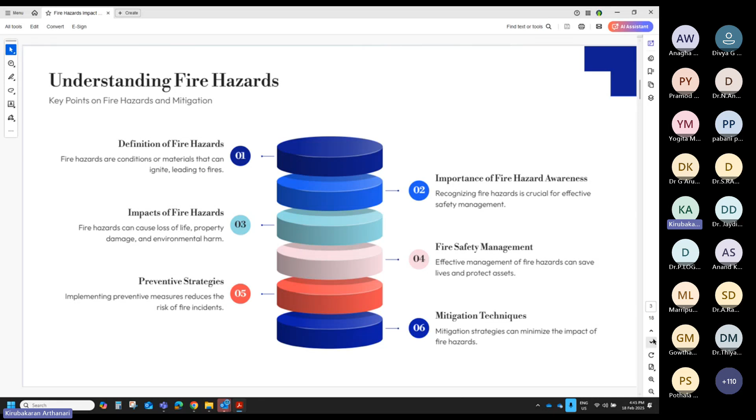Moving on to the next one, understanding the different fire hazards. I'll give you an overview. There are a couple of factors. One is electrical hazards - that's a major thing which plays a role. Faulty wiring, overloaded circuits, or damaged appliances can ignite fires. That's an electrical hazard.

There are items or materials which can lead to fire, like flammable liquids, flammable gases, or reactive chemicals - if some chemicals, a couple of chemicals...

Sorry for the interruption. Is there any problem in the presentation? I think some participant's mic is on. Sir, yeah, it has been muted, sir. Yeah, yeah, okay, shall I continue? Yeah, you can proceed. Yeah, thanks.

So as I said, flammable liquids, gases, or chemicals need to be stored separately. If they react, it can lead to fire or explosion. Those items are called chemical hazards.

Then we have environmental hazards like vegetation - uncontrolled or untreated vegetation, wildfires, and insufficient fire breaks, which can lead to bigger danger. We have a live example in 2025, the US wildfire, which had a huge impact in the US. We will come to that - I have some information about that incident, and we will brief into it.

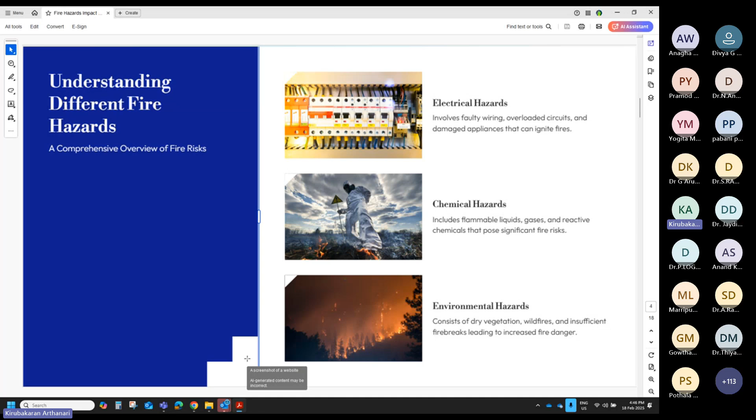So the types of fire hazards - identifying various sources of fire risks. First is flammable material, such as gasoline, wood, textiles, which can ignite fires. Those are called flammable materials. The proper handling and proper storage of flammable materials is very important in order to avoid fire hazards.

Then we have electrical hazards - faulty wiring, overloaded circuits, or improper use of appliances, which can result in electrical fires that often spread rapidly and unpredictably. Routine maintenance and checking of electrical wirings, appliances, or switches need to be monitored and maintained regularly, so that we can easily avoid electrical hazards.

Then we have chemical hazards. As I said, there are highly flammable chemicals, especially in the construction industry, like shuttering oil, adhesives, or grouting materials, which can lead to fire. These things have to be stored in a proper location in a segregated manner, properly labeled, cleaned, and stacked properly to avoid any explosion.

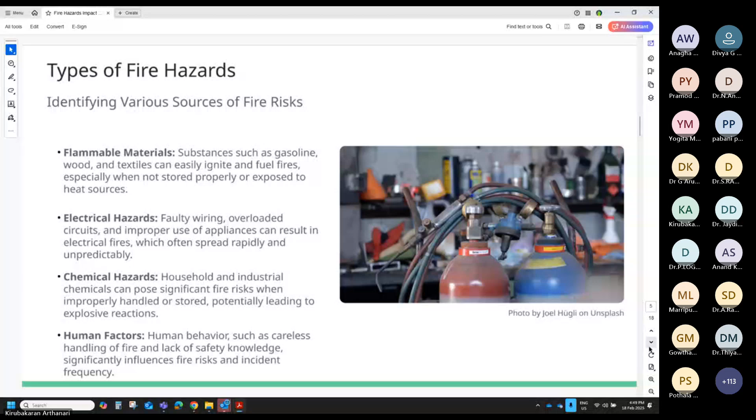Understanding the causes: human error - statistics have revealed that around 50% of fires are attributed to human activities, underscoring the need for public awareness. People are either not properly trained, or awareness is not being given, or they are careless. That behavior can lead to a major accident.

Then we have equipment failure and natural causes, which we can avoid if proper maintenance and proper handling of things is done in a proper way. Then we can avoid those kinds of fire hazards.

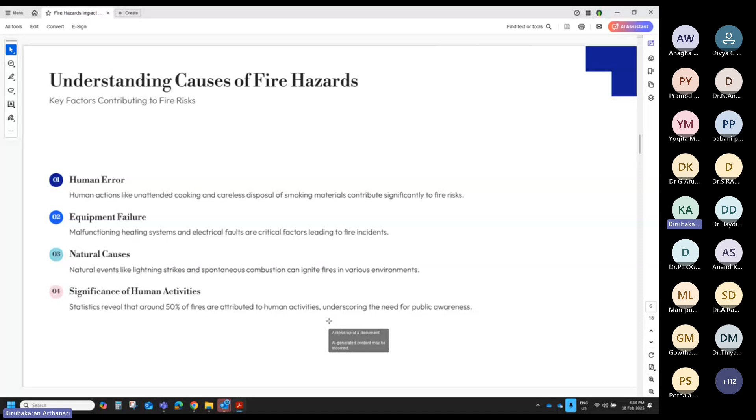Next, we can come to the significant consequences of fire hazards. The first thing is loss of life. In any case or factor, we don't want loss of life - that is the most significant consequence of fire hazards. Fire accidents result in thousands of fatalities annually, highlighting the urgent need for fire safety measures.

And we have property damages. Economically, it can affect individuals, society, and the nation as well. For example, take the US - there was a major fire which affected the entire country's economy, going in the wrong direction, because the amount of damage caused by this wildfire is unimaginable. We don't want that.

Then environmental effects - wildfires devastate ecosystems and contribute to air pollution, impacting wildlife and human health. The quality of air due to fire accidents is hugely affected. It's not just that fire happens and that's it - once burning happens, toxic gases are exhausted, which can lead to further complications like breathing issues and respiratory diseases. All those things can contribute.

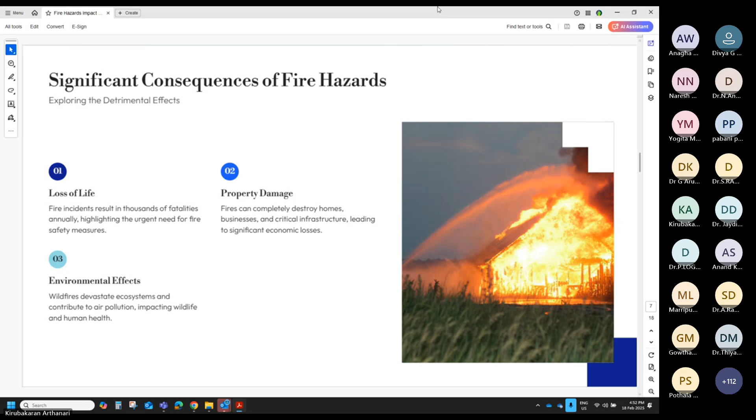So the impact includes economic losses, environmental damage, human health risks, and psychological effects. Economic losses, as discussed, can burden individuals through property damage and loss of productivity. Environmentally, wildfires and structural fires can degrade air, soil, and water quality. And for human health risks, we have long-term issues such as respiratory problems due to smoke inhalation.

That can affect people long term - it's not like it happens one day and is cured the next. It will be a long-term effect due to inhalation, and then there are psychological effects - the trauma which can happen due to such major accidents needs to be taken care of. It's not a day's job; it will take months and years to recover from that trauma.

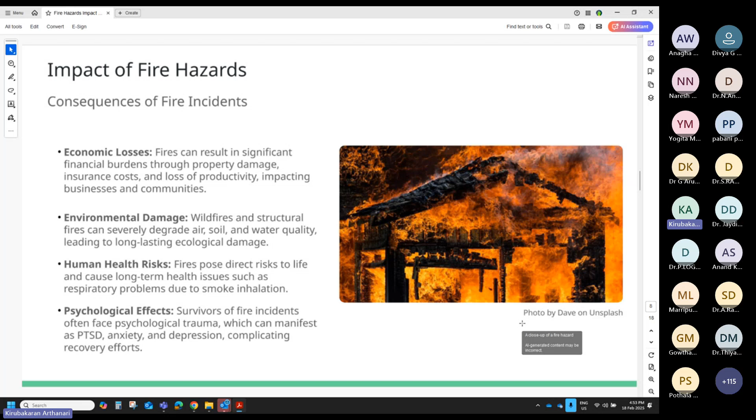So one small case study which we've all seen in the media: in early 2025, in the month of January, there was a huge wildfire in the US, especially in the Southern California area - Los Angeles and the metropolitan cities of San Diego County. There was a major fire.

The key facts are: more than 29 people were killed - it's not an accurate number, just some facts from the media. More than 200,000 people were evacuated, forced to leave. More than 18,000 homes and structures were destroyed, and more than 57,000 acres of land were burned.

These key facts are scary - more than 200,000 people were forced to evacuate from their own residences. It is not an easy case, and the structures destroyed - more than 18,000 homes - are a quick fact showing the scale of this disaster.

So this being okay, I can come to that point here.

These fires were exacerbated due to drought conditions, low humidity, vegetation built up from the previous winter, and hurricane-force-like wind, up to 100 miles per hour in some areas.

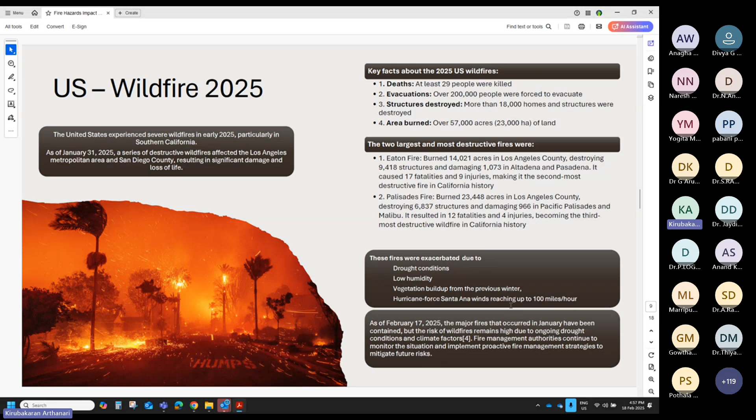In the coming days, hopefully they will have those reservoirs with enough quantity of water. It should not happen again in the coming years, but even then, if it happens, they should have the condition to mitigate those fires.

There, for the slab formwork, normally we use plywood and steel materials. So the slab was ready, the shuttering was completed, and the reinforcements were done. The inspections and quality check, everything was completed.

At night we were supposed to concrete that particular slab, but due to some reason we were not able to get the concrete, so the concrete pouring was shifted to the next day morning. We all went back home, and during the night, around midnight, we got a call that our slab was on fire. So we all rushed back, and unfortunately it was all eaten up.

The fire had already spread too much, the entire slab was on complete fire. We did the firefighting, but unfortunately we were not able to save any of the property. All the property was damaged - the formwork materials, the reinforcement, everything was destroyed. We had to chip those concretes again and redo those things.

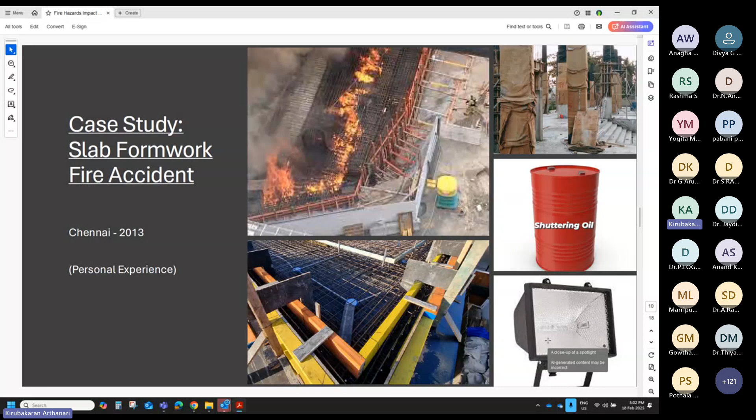Then moving on to the next one: fire risk assessment, strategizing the fire safety. We need to identify the potential hazards, where on the sites how we are keeping the materials and which can pose fire risks. That needs to be identified, labeled, marked in a proper way, and protected properly.

The second thing is we need to evaluate how materials are stored and evaluate the risk levels, how dangerous or how easily it can cause fire. Based on that, it needs to be taken care of in high priority, medium priority, and low priority. That risk assessment management has to be done during construction or after, it doesn't matter, but it has to be done. And we need to prioritize based on the frequency and intensity of the fire hazard which can happen. So these are the three things we need to do, called fire risk assessment.

Based on that fire risk assessment, we need to do the mitigation plan also, and we need to strategize it.

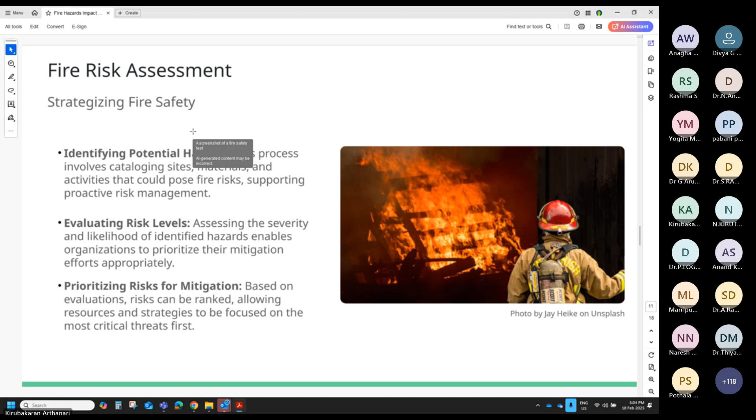Fire prevention strategies for mitigating fire hazards effectively. The first thing is education and training. Regular training programs have to be conducted for the laborers or technicians working in the construction industry and the residents who are going to stay in that particular building. Once they are into the building, frequent fire safety drills or mock drills have to be conducted. They need to be trained properly: even if there is a fire accident, what is the quickest path or evacuation path they need to follow to exit the building at the earliest. They cannot use the lift, they need to use the staircase, and go to an assembly point wherein there won't be any further hazards.

Those kinds of trainings need to be given to the people, that is the first thing. Then the proper storage of flammable materials, which is already discussed, and regular maintenance of equipment.

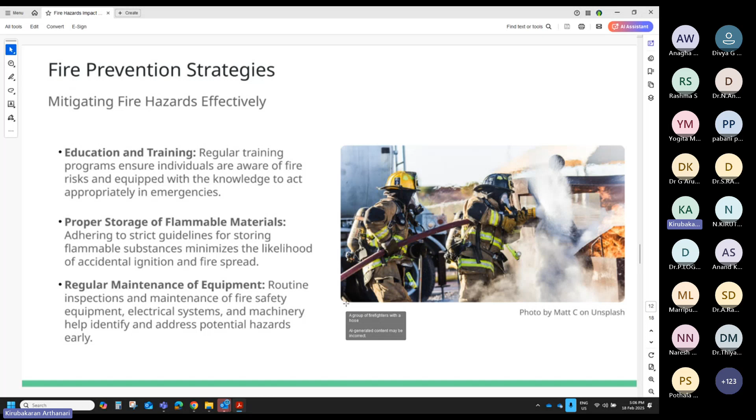So any material, any equipment which has been used in a particular area or site has to be properly maintained, properly inspected on a regular basis to avoid any further fire accidents or fire hazards. Even the fire safety equipment - the fire extinguishers kept on the floors - needs to be checked on a regular basis, every 3 or 6 months, so that in case of any unwanted situations when we try to use the fire safety equipment, it cannot give further complications. It should not lead to further hazards. So that needs to be well maintained and well checked in advance.

Fire suppression techniques, water-based systems. We have fire hydrants, sprinklers, and water cooling and smothering properties of the extinguisher for fighting fires effectively. So we have fire hydrants and sprinklers.

So fire hydrants have to be used manually when the firefighters come. We have a fire hydrant, they can connect to it and mitigate the fire. And we have a separate standalone fire pump room which has a tank with a full amount of water, which cannot be used for any other activities other than firefighting. So that is a strict rule which is followed here.

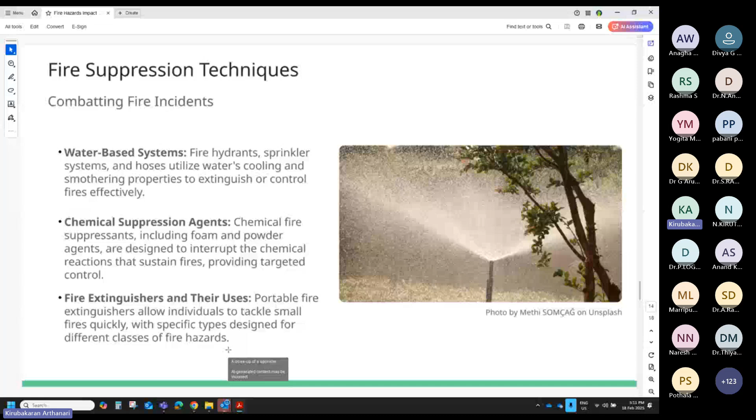Then emergency response planning: we need to create the emergency plan, train the people, and do the evacuation procedures. First of all, we need to identify the emergency plan. Meaning if there is a fire in a particular building, what is the evacuation plan? What is the best route the people in that building can take to escape from the fire at the earliest? That needs to be decided during the design stage itself. We need to create that emergency plan and it needs to be followed.

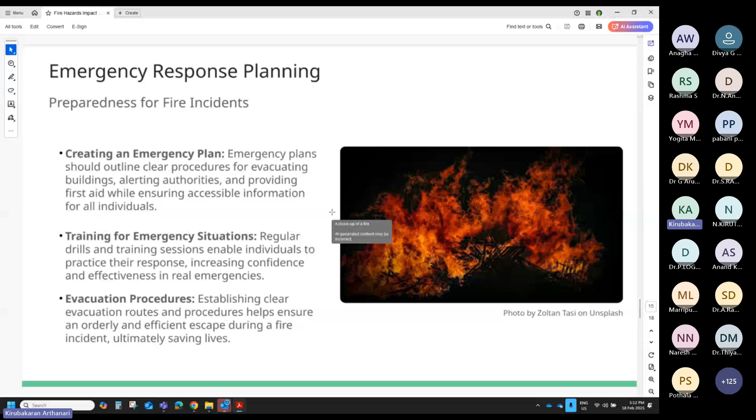So I'll show you the drawing which has the evacuation plan and how to notify the people quickly that there is a fire and we need to evacuate the building. So we have a system running for that. I'll show you the drawing and explain about it.

So there are some drawing references which have been used in our buildings. I won't go too deep into those drawings, but let me show you some drawings.

So first of all, there is a thing called MEP penetrations. Concrete will not transfer fire from one area to another area, it will stop the fire. But we have MEP - mechanical, electrical, and plumbing - penetrations from one room to another or from one floor to another floor. That is called MEP penetration.

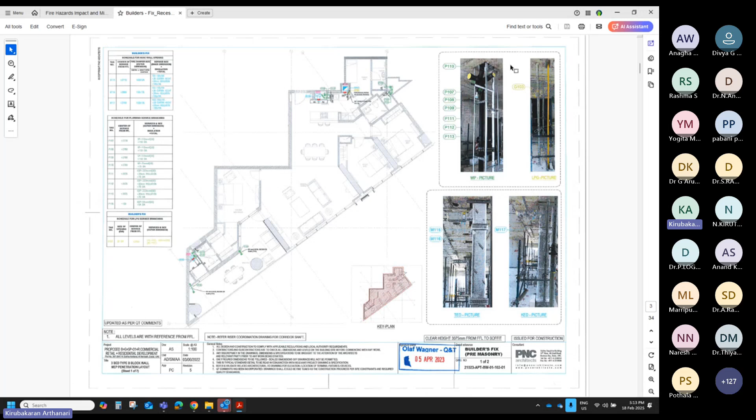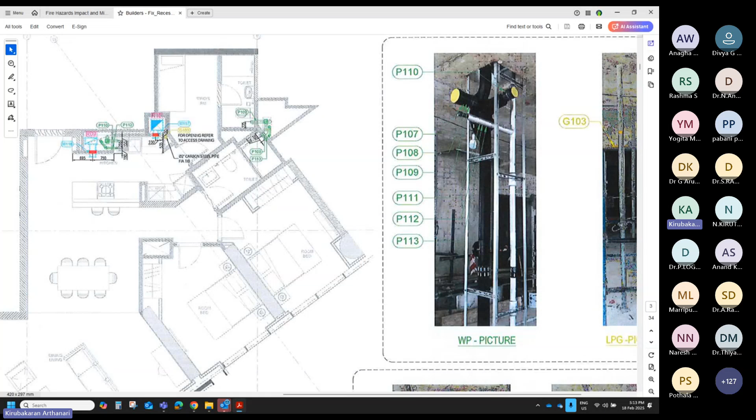For example, this is a drainage pipe which runs from top to bottom - if the building is 25 floors, it runs from ground floor to the 25th floor. In the slab we have an opening to pass these pipes, which is called MEP penetration. This needs to be properly treated so that if any fire happens on a particular floor, it should not spread to the next floor or the next room. For that, we need to do proper fire protection at the MEP penetration so that the fire cannot go further. I will show you a detail of how we treat this particular condition.

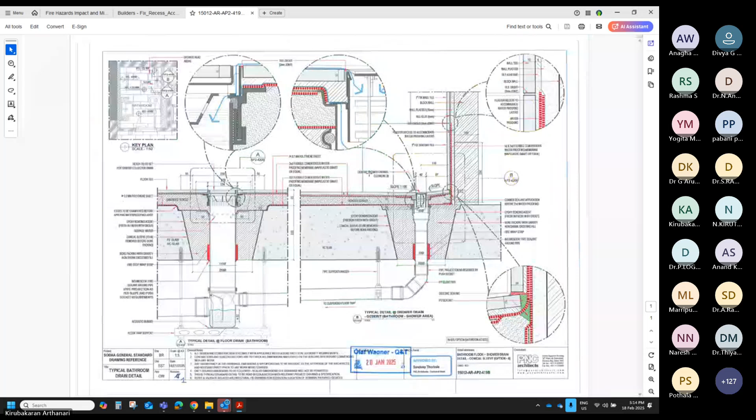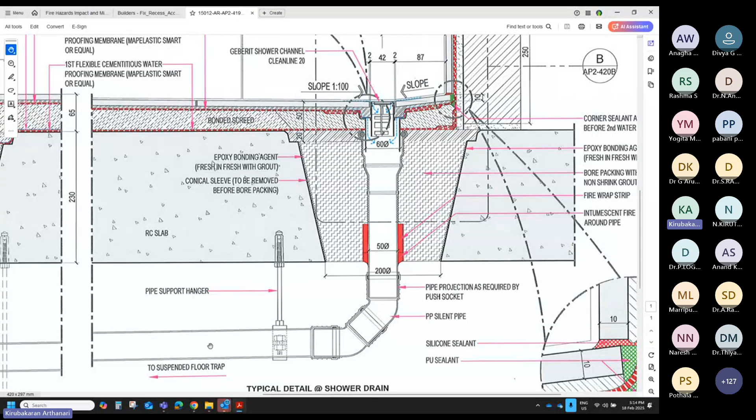So here is the situation: this is the RCC slab, and this is the shower drain and the MEP downtake pipe - the plumbing downtake pipe, which is a polypropylene PP silent pipe. We have an opening of 200mm here, and the pipe passes through it, going from one floor to another floor.

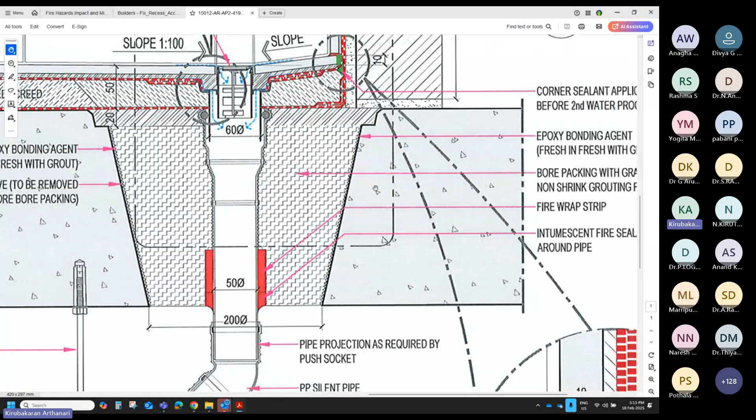Here you can see the intumescent fire sealant around the pipe at the joint. So first there is an opening in the slab, then the downtake pipe is installed. It needs to be properly packed with bore packing non-shrink grouting - once the pipe is fixed, then we do the grouting.

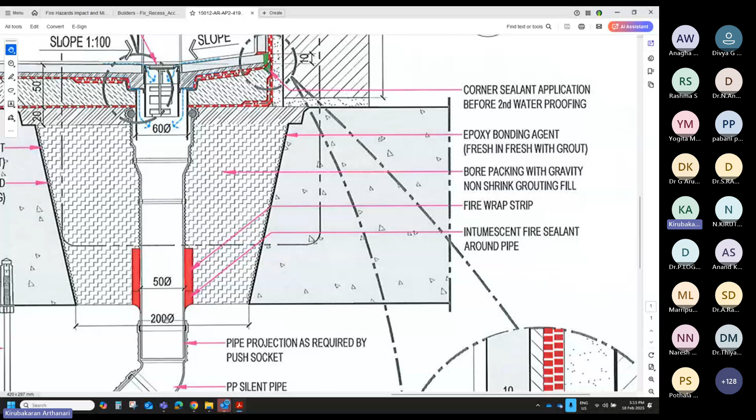After that, we need to do the fire wrap - there is a tape called fire wrap that can contain the fire for up to 2 hours. At the joint, we apply an intumescent fire sealant on the edges, which can also contain the fire for up to 2 hours. This is how each penetration is handled.

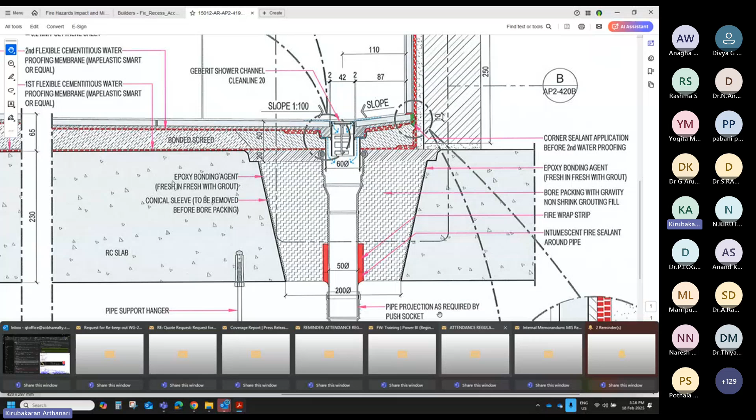Each penetration is taken care of in order to avoid fire transporting from one area to another. So every MEP penetration has to be treated this way to ensure fire is not transmitted from one floor to another. And it has to be done - it's not just a good practice you can optionally do to save people, it is mandatory.

Here in Dubai, as per the Dubai Municipality and Civil Defense regulations, every MEP penetration has to be treated, and there needs to be a sticker - a penetration fire stop system sticker placed at each MEP penetration. It has to be checked and approved by the fire stop company, and only then can we get approval from Dubai Municipality and Civil Defense.

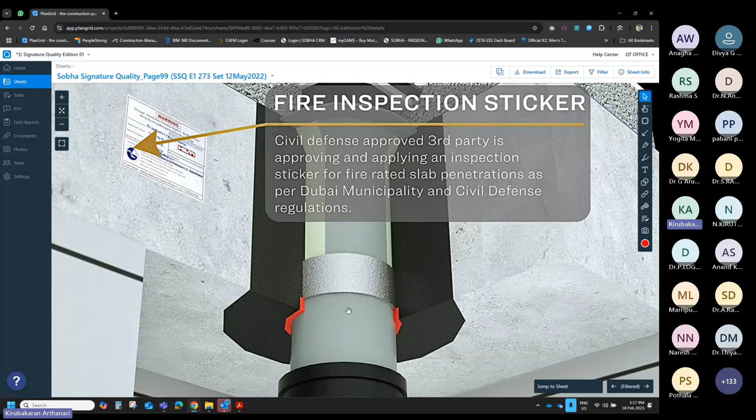So it looks like this: this is the pipe which passes through the slab, and we have what is labeled as fire wrap strip, with a sealant around the joint which can contain the fire from spreading from one floor to another. So this is one condition.

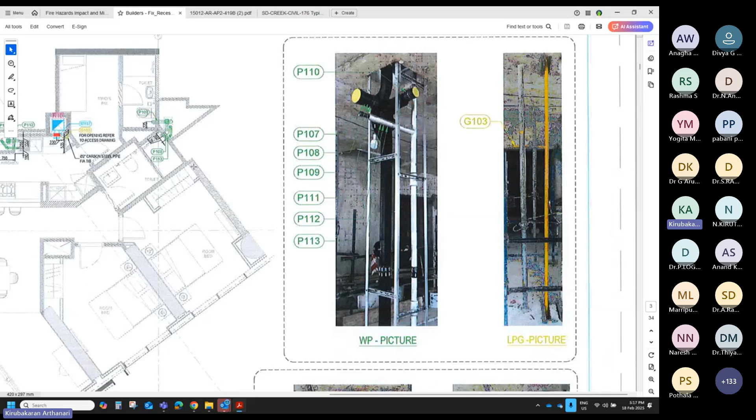We are taking more standards as per Dubai government's standards and regulations. We have more number of standards which need to be followed. I am just showing a couple of examples. One is for the MEP penetrations, which we have seen now, and there is another thing.

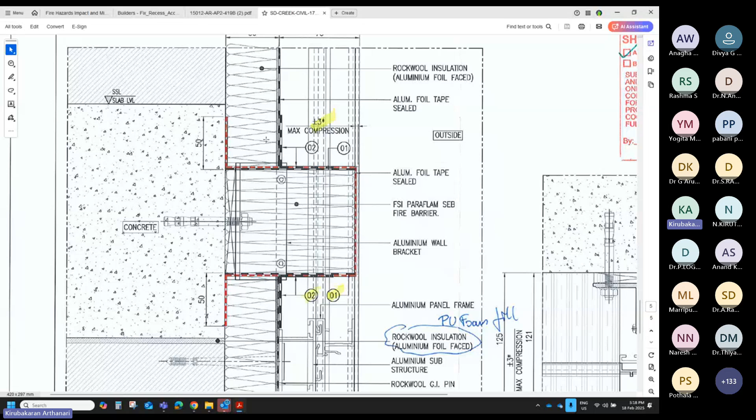Most of the buildings, like 90% of the buildings, have a facade system in front of the building, and there is a chance it can catch fire. For that reason, we have a standard detail where in front of the concrete we have a rock wool fire barrier which needs to be installed. Only then can the facade be installed, so that even if there is fire in the facade area, it should not travel from one area to another. We need to stop the fire at a particular level, so we have this fire barrier made of densified rock wool which needs to be installed.

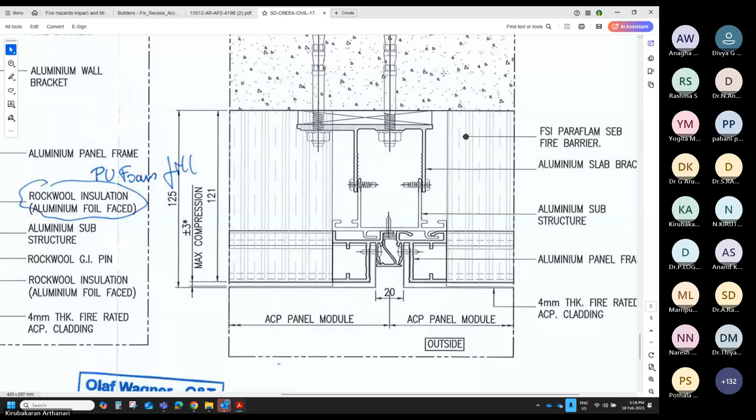This is the concrete, then there is a channel, then we have a fire barrier installed for 125mm, then we have the ACP panel. So if there is any fire in this cavity, it has to be stopped at that particular level. At one level, if there is a fire, it should not travel to another level. That is the idea behind this particular detail.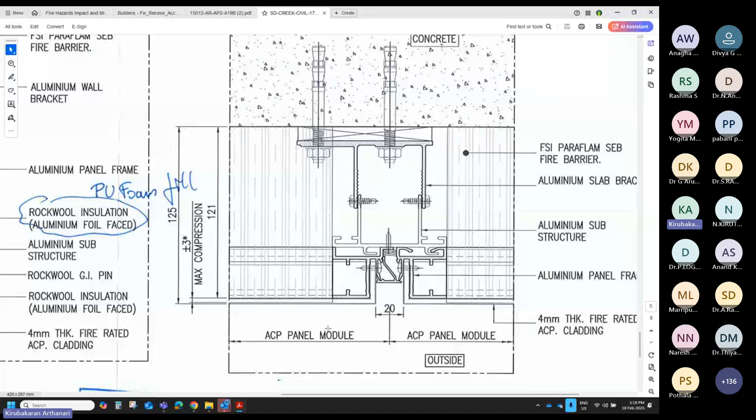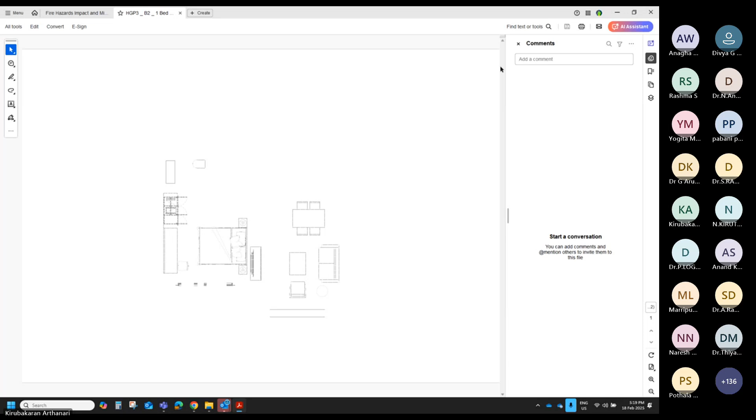So this is about the scenarios we have during construction. It's not the only case, I'm just giving you two examples. Now let me give you another example. This is one standard apartment layout.

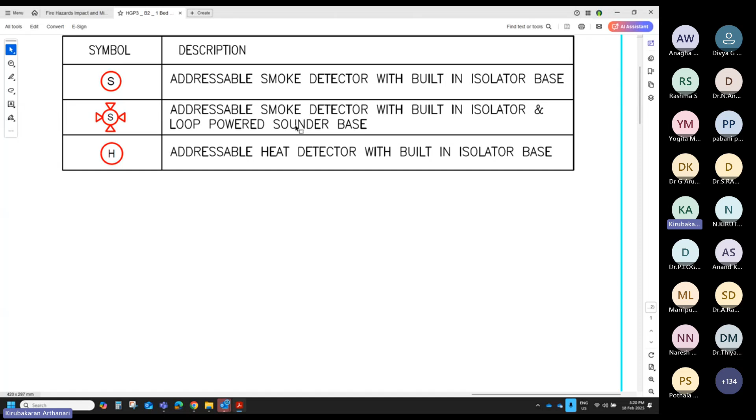Here we have the fire alarm layout. We have three legends: addressable smoke detector with built-in isolator base, addressable smoke detector with built-in isolator and loop powered sounder base, and a heat detector. This is the smoke detector, which is in the bedroom and living area, and in the kitchen we have a heat detector.

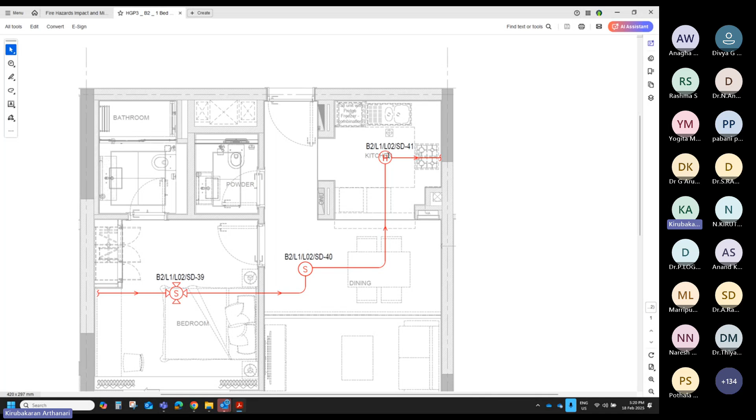Once a particular temperature is reached in the kitchen area that is not normal - the kitchen normally has some heat, but there's a desired threshold value, I'll check on that value and let you know - once the heat detector gets a value more than the normal value, it automatically signals the fire alarm. It triggers the fire alarm, which goes to the security panel, and from there it can be further taken up.

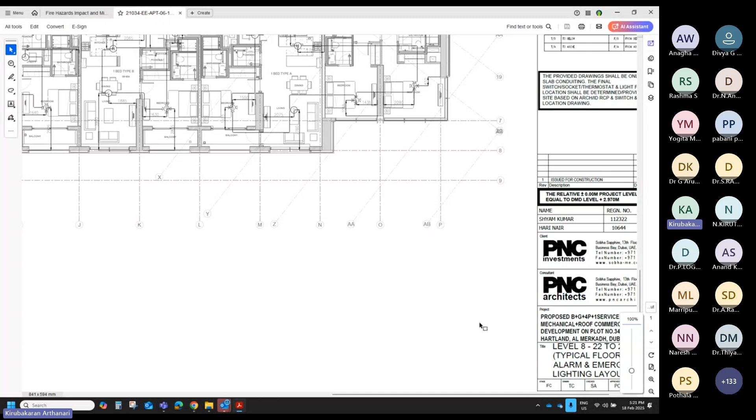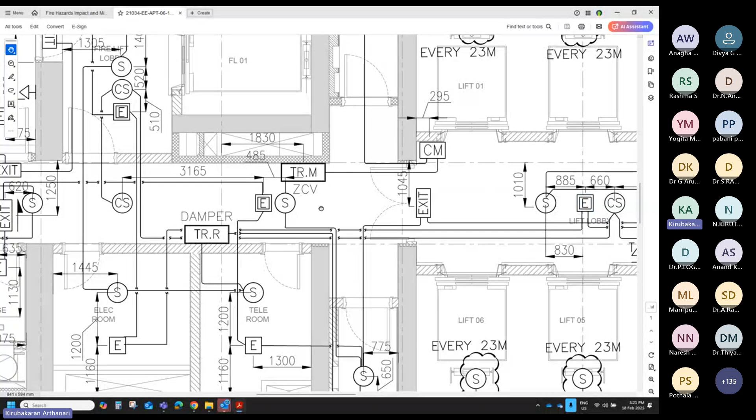Then we have the fire alarm and emergency lighting layout here, this one, for a project in Dubai which we have recently handed over. This is one floor with 10 apartments, and we have these items marked here. I'll show you the legend so we can understand what items are used on one floor for the fire alarm and emergency light.

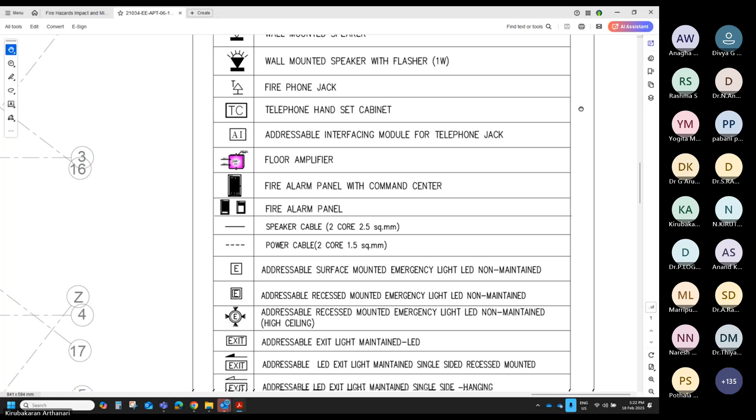There is a ceiling mounted speaker with a flasher and a wall mounted speaker, connected with the building management system. If there is any fire alarm, it will go to this speaker and make sound on each floor in front of each apartment. Then there's the fire phone, telephone, floor amplifier, and fire alarm panel.

Then we have the emergency exit display boards, showing the quickest path to follow in case of fire - that exit has to be shown properly. So we have different types of smoke detectors and heat detectors.

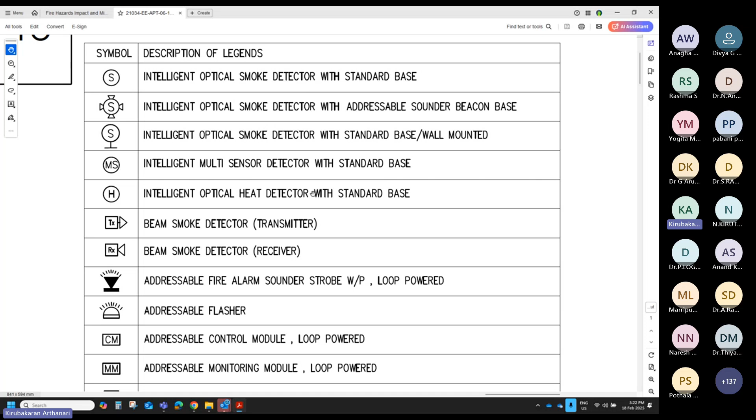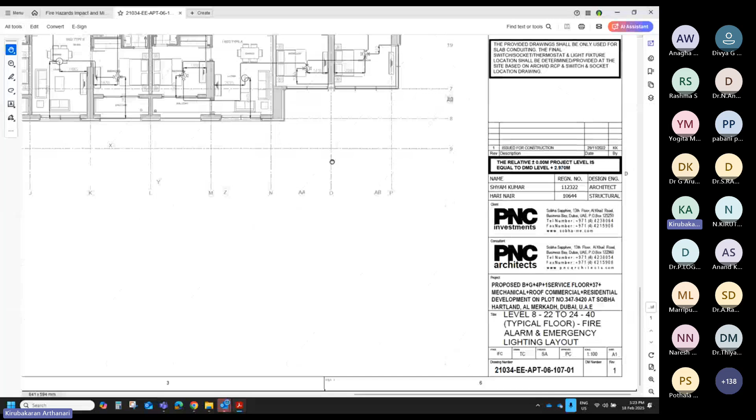So in each apartment, what do we have? A smoke detector in the non-fire areas, let's say, and in the kitchen we have the heat detector. So this is only for the fire alarm and the emergency lighting layout. In terms of fire, in case of fire, how to contain it?

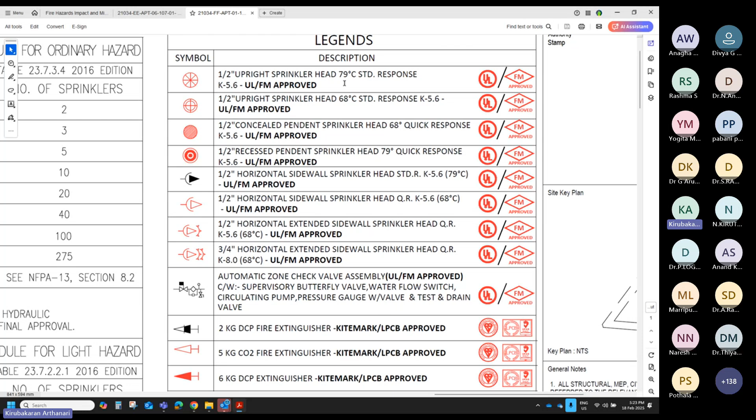So firefighting layout. If we have fire, then what are the things? Here we have the sprinkler, half-inch upright sprinkler, which has a 79-degree standard response, and we have a half-inch upright sprinkler with a 68-degree head. It activates once it reaches 68-degree temperature, and the other activates only when it reaches 79-degree. The 79-degree sprinkler is for the kitchen, and the 68-degree sprinkler is for the non-heat or non-temperature areas.

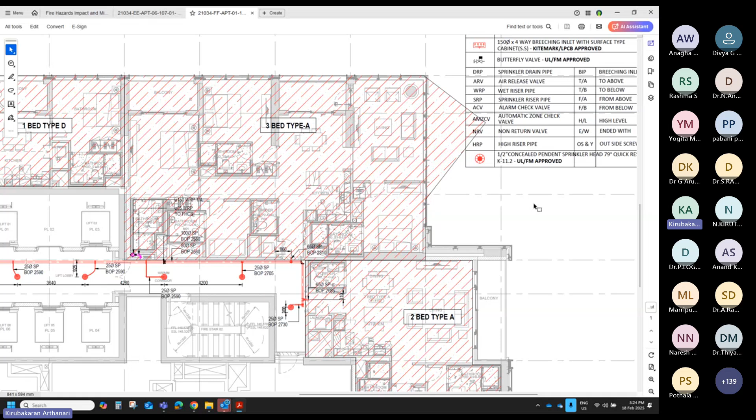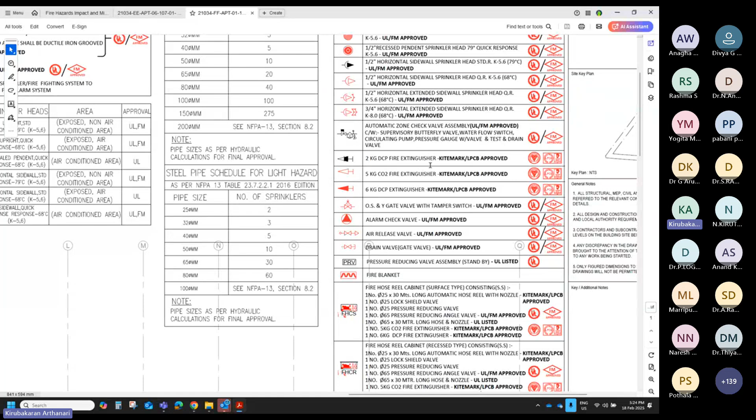So we have the sprinklers, the ceiling sprinklers, and we have the wall sprinklers, and we have extinguishers placed on the corridors, and we have the fire hose cabinet on each floor, and more.

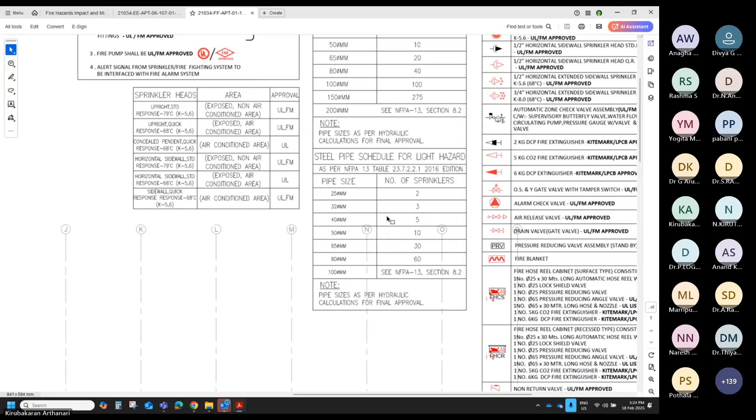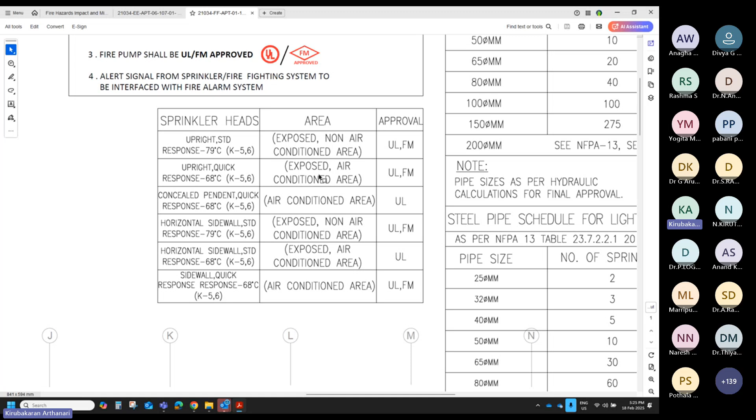So here the sprinkler heads, we have different types of sprinkler heads. Upright 79-degree standard response sprinklers, it is for the exposed non-air conditioned area, and upright quick response 68-degree sprinkler, it is for the exposed and air conditioned area.

Concealed pendant, horizontal side wall. So we have different types of sprinklers which are being installed at different locations based on the authority's standard requirements. So it's not that we decided; it is from the standard codes and rules which have been followed here from the Dubai Municipality and the Dubai Civil Defense.

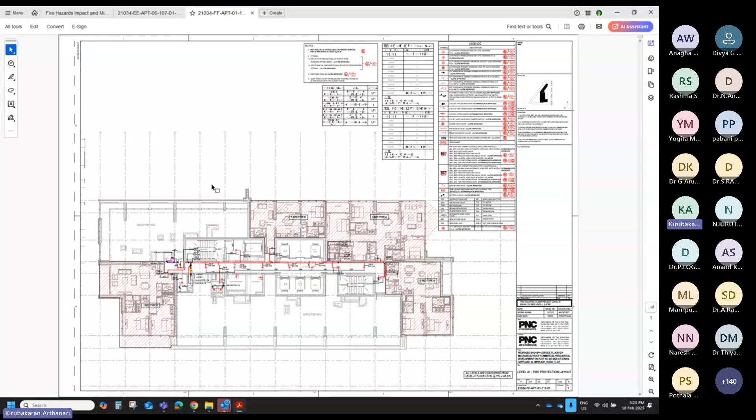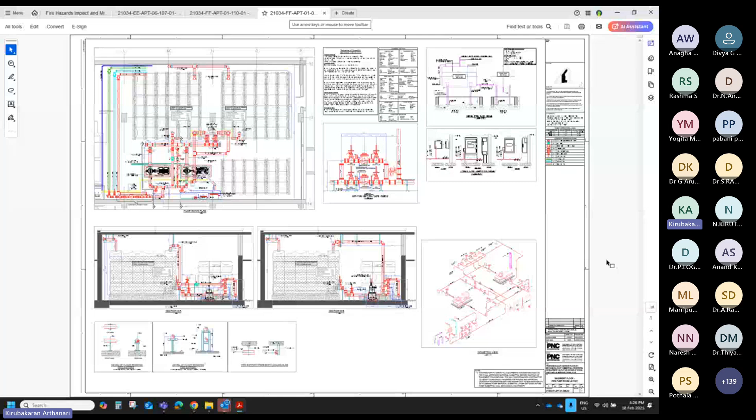And finally, I can show you the drawing for the fire pump room. So this is a standard drawing, or let's say for this particular building, we have a fire pump room at the basement. It has a capacity of...

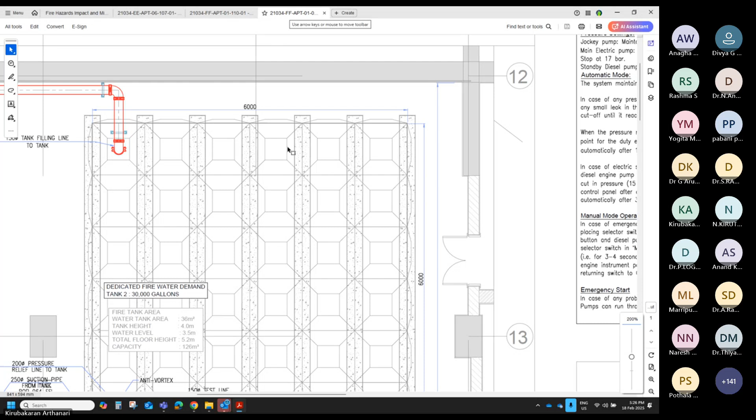Dedicated fire water demand tanks, two of them, each has 30,000 gallons of water. The standard requirement is based on the capacity of the building and the number of floors and the height. Here we have two tanks of 30,000 gallons of water each.

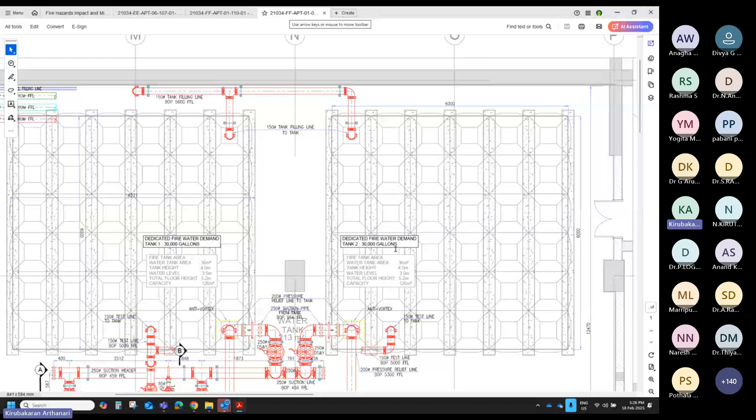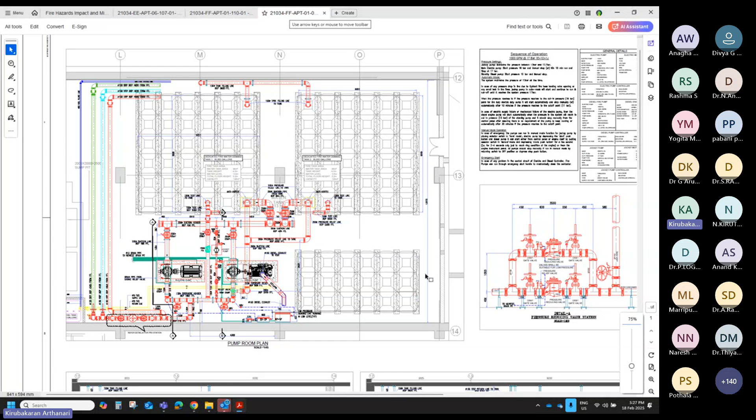And we have the pumps, like one is electrical pump. You can see here, so we have an electric pump and we have a diesel pump, so that at any circumstance we can use both. If electricity is not there, we can still use the diesel pump for the mitigation of fires. So some examples I just wanted to show.

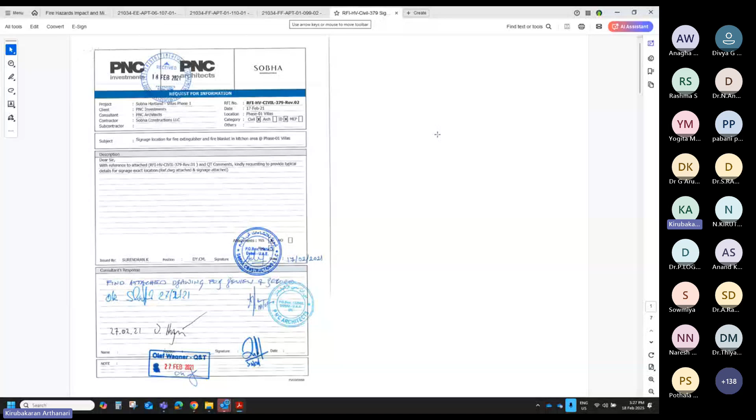Actually, this is not a standard requirement, but from our company we have implemented this particular standard for our buildings. So in case of any fire, for each building or each apartment, we need to provide one fire extinguisher and one fire blanket, and it's normally provided in the kitchen area.

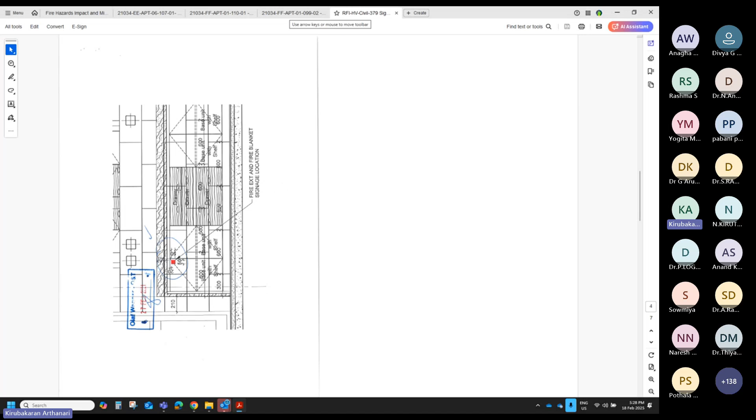And in case of any fire, the resident who is residing in that particular apartment should not struggle to find the extinguisher or the fire blanket. Because in some areas we are keeping it inside cabinets, so they should not struggle to find where it has been kept. For that reason, we have implemented a standard to place this sticker on that cabinet, so that in case of emergency, people can easily and quickly find the fire extinguisher and fire blanket to control the fire at the earliest, as soon as possible, they identify, they can immediately start acting.

So these are some standard practices I wanted to share, which we are following from our company's point of view and in our region, which I wanted to share with you people. Then, any queries?

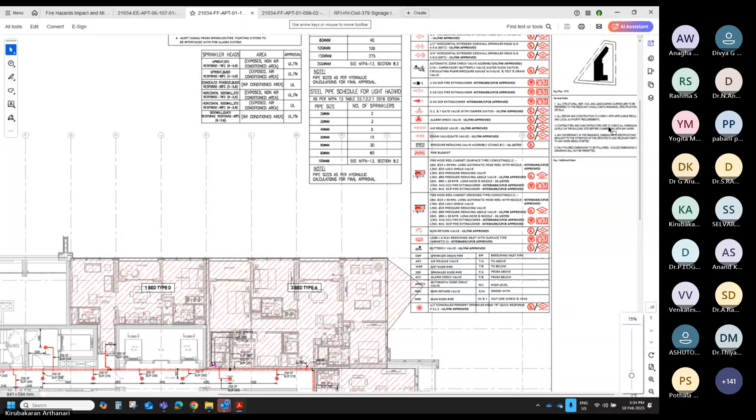Okay, so in terms of the fire safety codes, we normally use what's mentioned in the drawings. It's according to the DIN standards and US standards. So we are using the DIN code and the US code, and I'll give you the exact code. But before that, for the improvements which need to be done in Indian buildings...

So the first thing we are using is a very basic thing, like the fire extinguisher and the fire blanket, which is provided in each apartment. That is important, because kitchen fires can happen at any time. We cannot control that, as it is purely upon individuals—if they are not attending to their cooking, or the clothes we normally wear can lead to fire accidents.

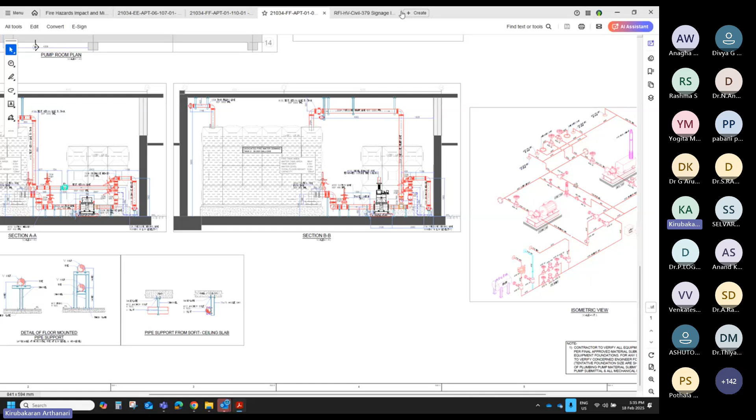But it can be solved or controlled immediately if there is an option for a fire extinguisher or fire blanket available at hand's reach. That needs to be ensured at the first level. For that, we have implemented this standard—it's not our own standard, it's the Dubai government standard that we need to provide an extinguisher and fire blanket in each apartment.

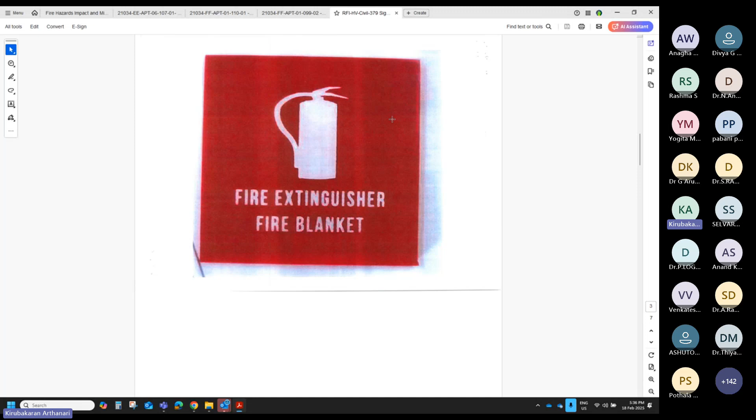We have provided it, but where to find it? Some people will not easily find it, so we introduced a sticker from our side, so they can reach it easily and quickly. The second thing is we are using the latest and very important detection systems—sensors. In each apartment we have a smoke detector and heat detector that can be incorporated or installed in each building, so that in case of fire it can trigger the alarm immediately and people can act quickly. That is the first thing, as we are moving into residential high-rise apartments and high-rise buildings as of now.

So we are into what we can call dense population, but nobody knows who is living next to each other. Once the apartment is locked, nobody knows who is living inside. So if something happens in that particular apartment, no other residents or neighbors will come to know what has happened inside.

If there is any fire, that has to be notified immediately to the neighbors. So for that we need sensors, even if the people are not there and some electrical equipment is faulty and catches fire. So unoccupied apartments also, if there is a sensor, it can immediately notify the other people and immediately notify the building security. That sensor has to be installed in all the apartments or all the units so that it can notify the security immediately and they can act quickly.